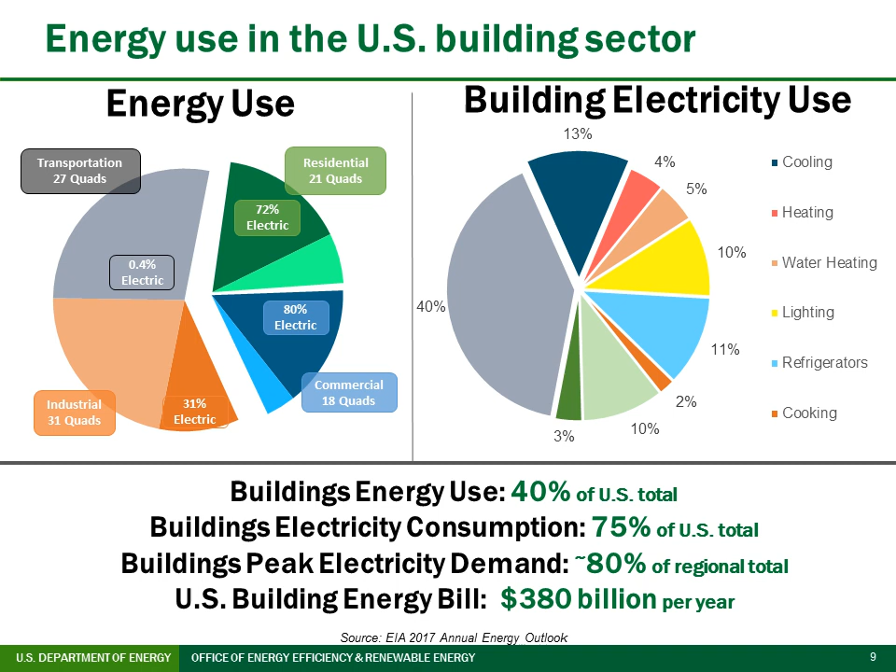And then, I won't talk about it today, but that growing wedge called other or miscellaneous. I'm sorry, I see on the right, the graph didn't come out. The color coding, the legend didn't come out, but that big gray on the left, that's 40%, is for other plug loads and other miscellany, which may or may not be time sensitive. Next slide, please. So those are the stakes involved here.

You've all seen this graph. You probably all presented this graphic. The Thomas Edison early vision is on the left, the one-way power flow, and that on the right. This is just a reminder of where we, as a nation, and we at the department, are bringing the power grid to an interactive, dynamic, flexible grid in which there are many resources to produce power and many opportunities to consume it more intelligently, and not just one-way or even two-way power flows, but multiple power flows. Next, please.

So we put a lot of effort in at the Building Technologies Office at DOE on, as I referenced earlier, helping buildings to be able to be a more dynamic part of the power grid. So even as they consume that 75% of the kilowatt hours consumed in this country, generally that's been static. You plug something in, or you turn on an air conditioner or an electric hot water heater, and it consumes the number of electrons it needs to do the job. And we've worked in this office, and many of you have, to make the process more energy efficient in a traditional way, do the same job or better with less energy input.

But now we're focusing a lot of our activity on making those loads flexible in a way that can be controlled by the end user, controlled by a building owner or manager, controlled by a third-party aggregator, and even potentially controlled by a utility or a grid operator on a dispatchable basis. And by making those loads more flexible, with more ability to do that, we can shift load. We can lower the total system cost, so that energy can be more affordable for American homes and businesses. And we can make the system more reliable, and we can help integrate renewables. That's our goal. And to be able to do all those things is a challenge.

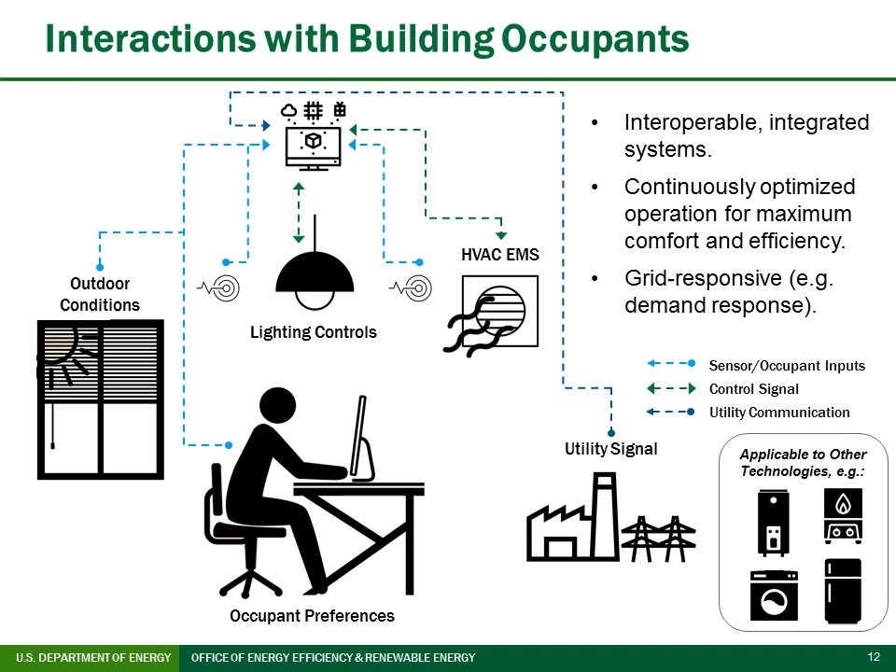Those are the capabilities that we're contributing to here with our research program and other programs. And again, that can be done because the occupant told it to do so, because the manager told it to do so, because a smart algorithm that was programmed told it to do so, or because the utility sent a signal saying prices are high or the system's stressed, or prices are low, and go for it. So next, please.

Of course, when I say go for it, we mean on a pre-cooling or temporary basis, not to be wasteful, but to shift load. So this concept, flexible building loads, which we often call grid interactive efficient buildings, and again, we want to keep that word efficiency in there. This is not just about load shaping and shifting. It's about making the buildings and the system more energy efficient in a grid interactive way.

Connected to the internet, so that those smart technologies and those remote opportunities can be taken advantage of, and we can control building load in a way to be more productive, more comfortable, more efficient through smart controls and through algorithms. So connected to the internet, but of course connected to the grid. It's connected to the grid now, but again, in a dynamic way, not just a passive way. And finally, flexible, which I've already described.

Next, please. The next slide, please. Sorry, I'm trying to make it advance, but okay. It is hung up for some reason. All right, thanks. Sorry about that. The reason I have to ask for this, our firewall at DOE, I won't even talk about cybersecurity today, but our firewall is very robust here at DOE, and we had a little trouble with the controls. Sorry, Kristen, can you advance the slides? I just got kicked off of the webinar. I apologize. No, we're good. Kristen, yeah, slide 14 is just where we want to be. Oh, I'm sorry, going forward, yeah.

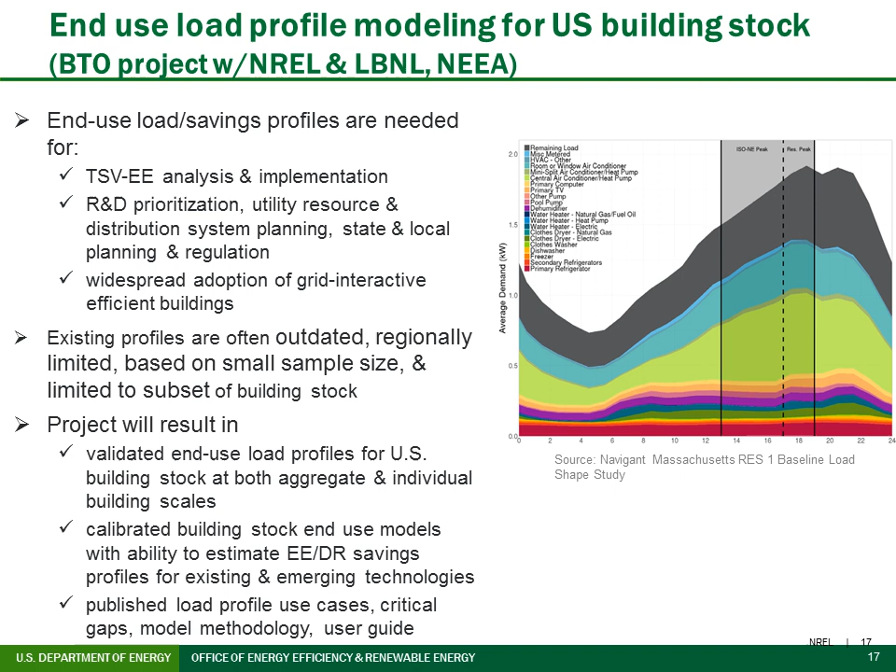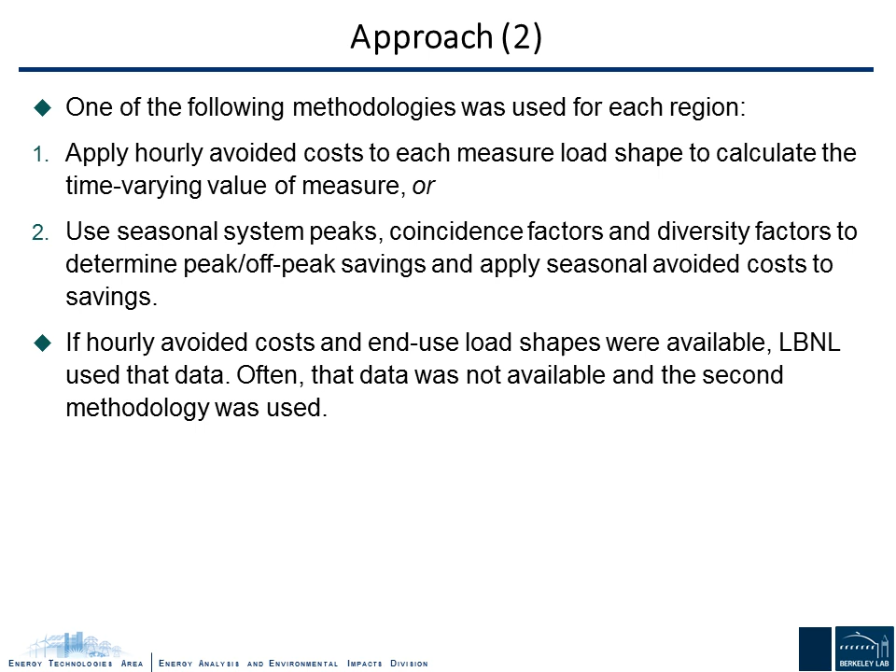This is a slide David showed in his presentation as well, from the analysis in our 2017 report. It shows the time-varying value of the 5 different measures in Massachusetts on a summer day. You can see that residential air conditioning, the top pale blue chunk of the bar, is for distribution, and the distribution costs along with the capacity costs really drove residential air conditioning value in Massachusetts on that summer day.

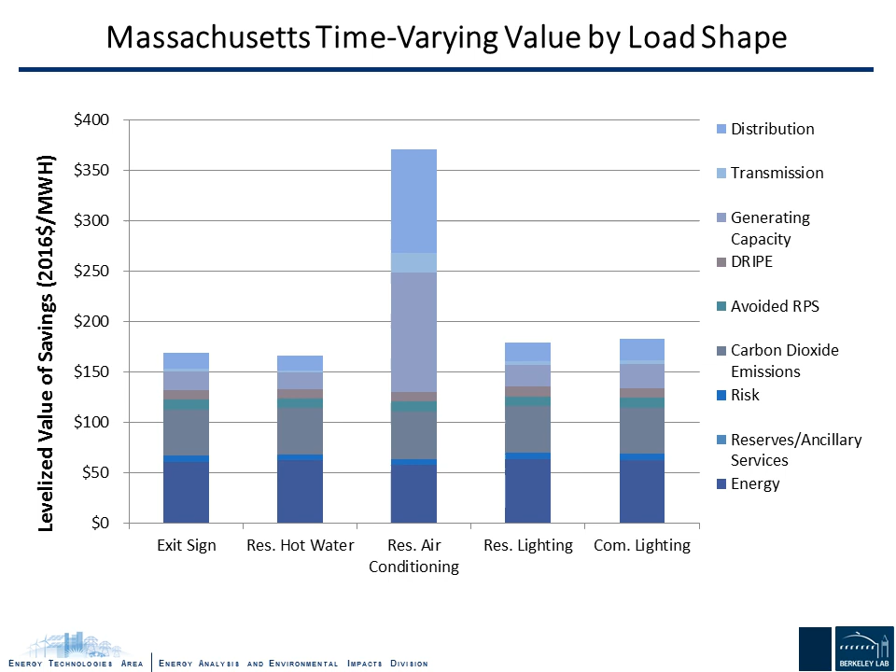So the different measures have different values. And if you looked at the winter slice of this data, it also looks different, and there isn't as much value for residential air conditioning, obviously.

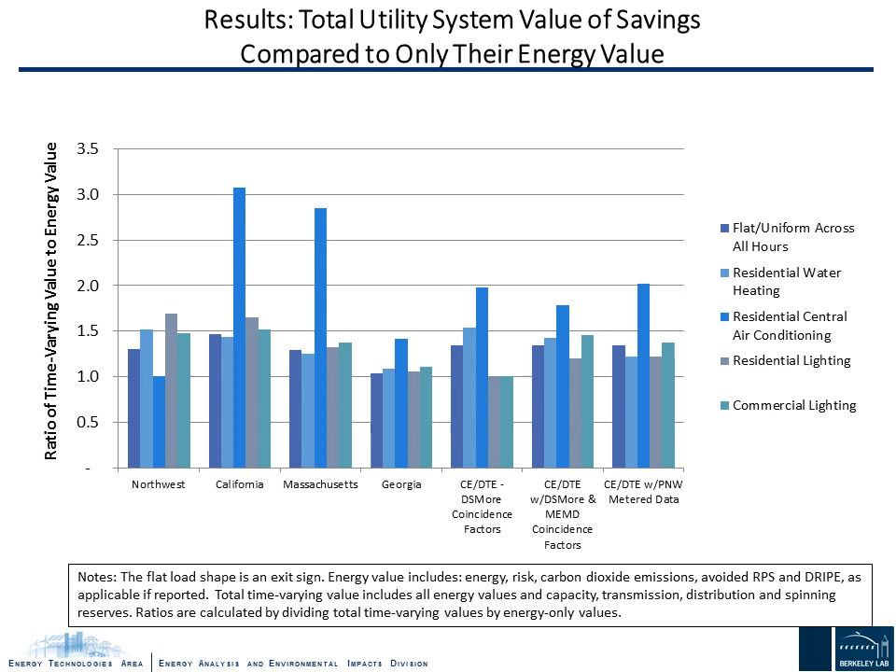I want to go through 3 or 4 conclusions and some examples pretty quickly. One conclusion we found important is that publicly available end-use load and energy savings shape data is pretty limited and concentrated regionally, and needs to be expanded. This is one of the reasons accurate load shapes are really important.

This chart shows that different load shapes from different data sources produce different outcomes, which isn't too surprising, but they can be extremely different. The tallest bar shows that simulated load shapes may not represent diversified loads, and the value for residential air conditioning is $500 for the levelized total utility system value, as opposed to load shapes not based on metered data, also simulated but more diversified, which are down around $200 per megawatt hour.

On the right side, our residential lighting chart shows that statistically representative metered data provides a more accurate representation. The far right bar is metered data from a similar latitude as Michigan, showing a value of under $70, as opposed to modeled data, which pushes the value of residential lighting up to $90.

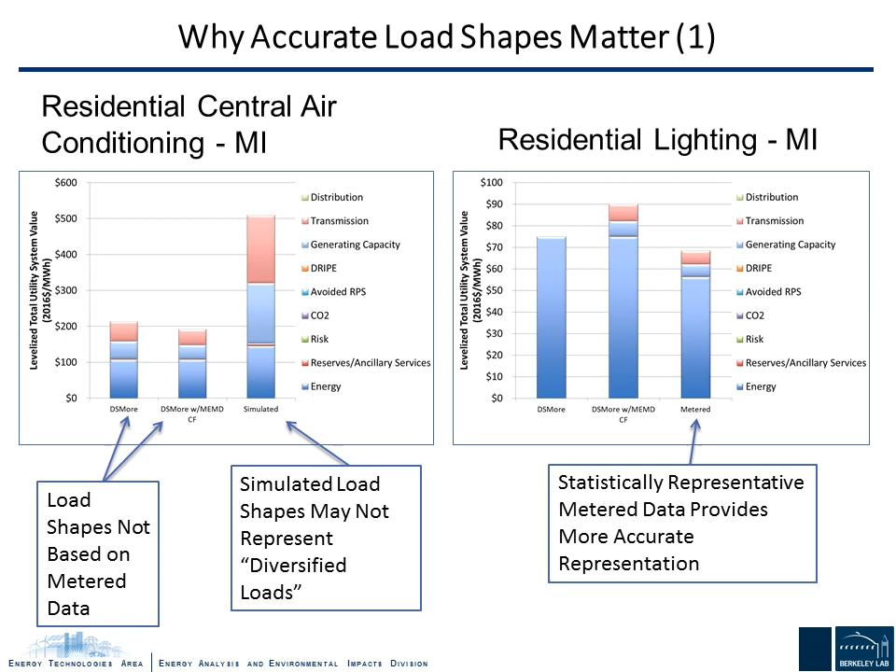I'll talk about this more on my next slide, which shows a graphic representation of the residential lighting example. The metered load shape shows a typical residential lighting pattern where lights go off at the beginning of the day, hours across the bottom of the chart. People wake up and turn their lights on around 7 to 9 a.m., then go to work and turn them off, then come home and turn them back on. So a pretty standard residential lighting shape.

That's producing a value of about $56 a megawatt hour, as opposed to some of the modeled energy efficiency for residential lighting that we looked at during our Michigan work, which produced a value of $75 a megawatt hour. So the modeled data was not as accurate as the metered data, producing different values. That's important because if you're planning your utility system or peak reductions around these values, you need to have them generating the appropriate values.

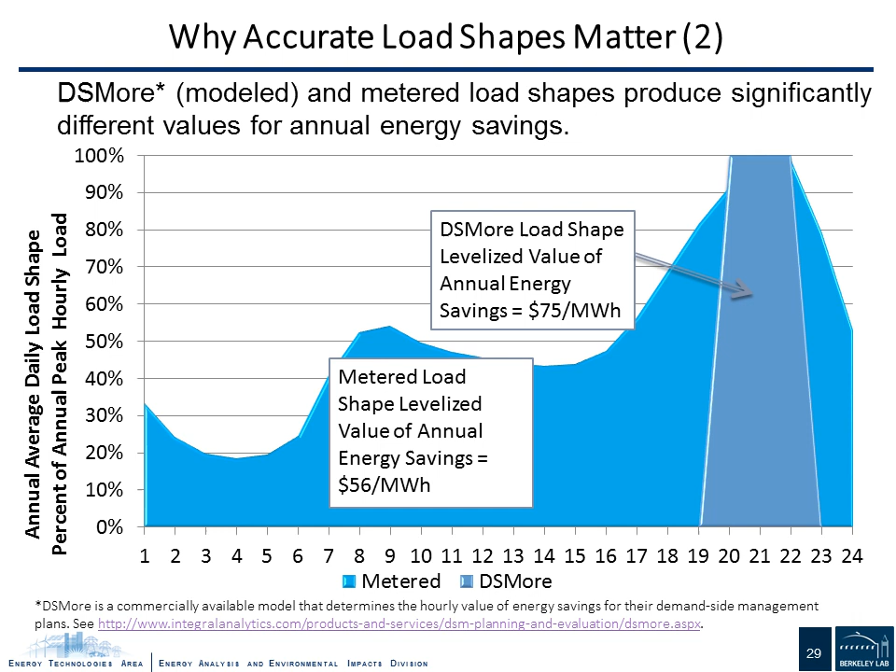Moving to the next slide, one of the other conclusions is that all avoided costs matter. In Georgia, we didn't have as much publicly available avoided cost data as in other regions, shown by only having two different colors in this stacked bar chart: capacity and energy. None of the other values were publicly available, so Georgia appears to have less value for efficiency than it actually does, based on conversations with the utility about what they use in their system planning, because they do have values for distribution and transmission.

They're just not available publicly. So when you start comparing across the country, if you're not looking at all the values together, you're going to have skewed outcomes, which may show values as higher or lower when that's not necessarily true. It's just based on the data that's available.

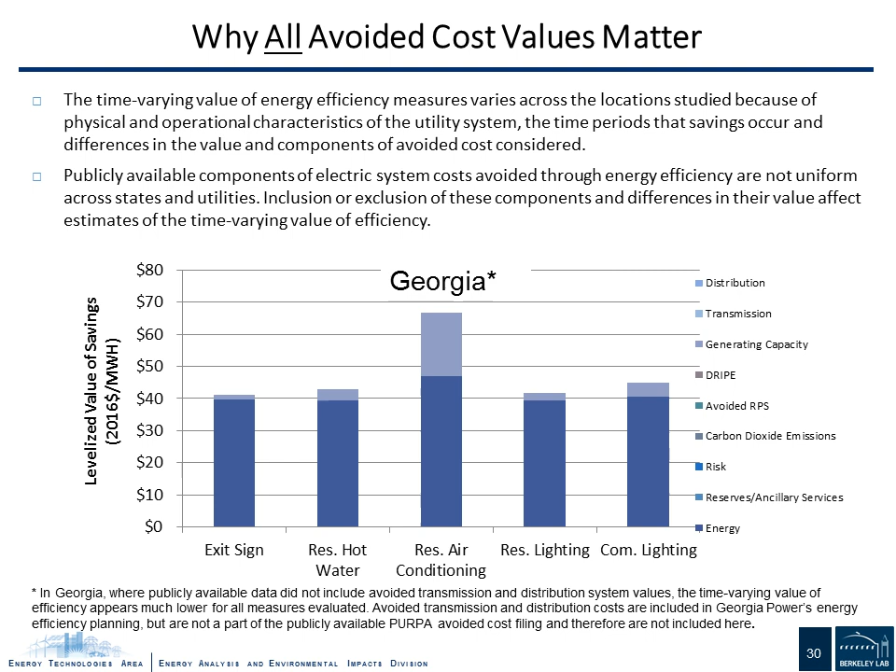Moving to the next slide, one of the other conclusions from the research is that the underlying electricity system shape is obviously very important. That's what's generating the avoided cost values and utility system values. And as many of us are aware, those values are changing.

This graph is from work that E3 did for PG&E, showing the difference from 2019 to 2024 in the increased use of distributed energy resources on the grid and the anticipated difference in load shape for utilities like PG&E. This was an important conclusion because the electricity system shape is changing in ways it hasn't historically, and the data we use to estimate the impact of efficiency measures on peak will need to be updated periodically to ensure we're giving appropriate value at times when the system is at its peak.

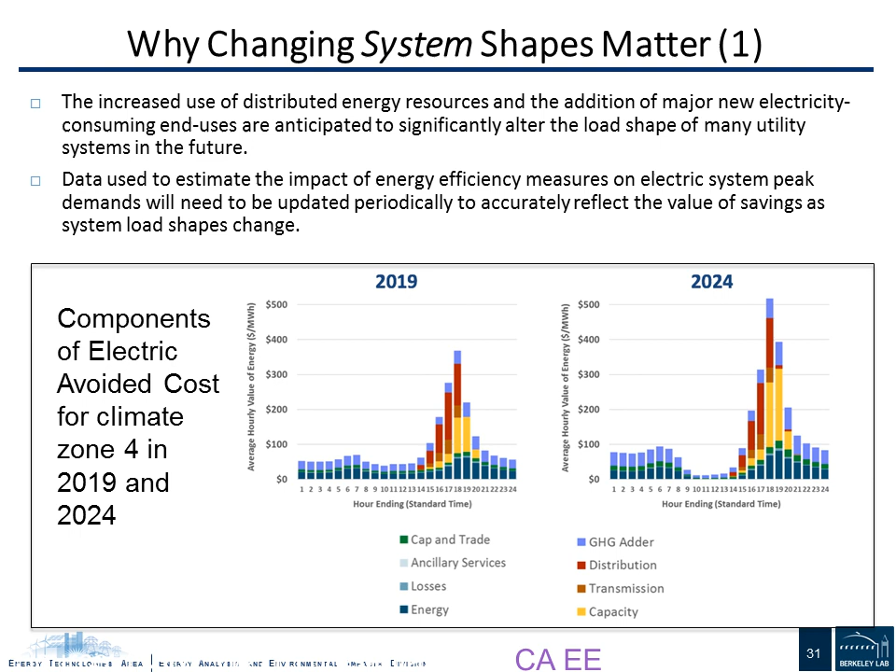That was a pretty big conclusion we came to. On the next slide, this is another example: a duck shape from work that Jim Lazar did for RAP, representing the opportunity for energy efficiency with this changing electricity shape. If we can use energy efficiency measures to reduce the ramp as variable generation winds down and people start consuming a lot of electricity going up that steep ramp, dampening that ramp will generate a lot of value and make the electricity system less expensive and easier to operate. So as the system shape changes, there are still opportunities for efficiency.

Moving on to the next slide.

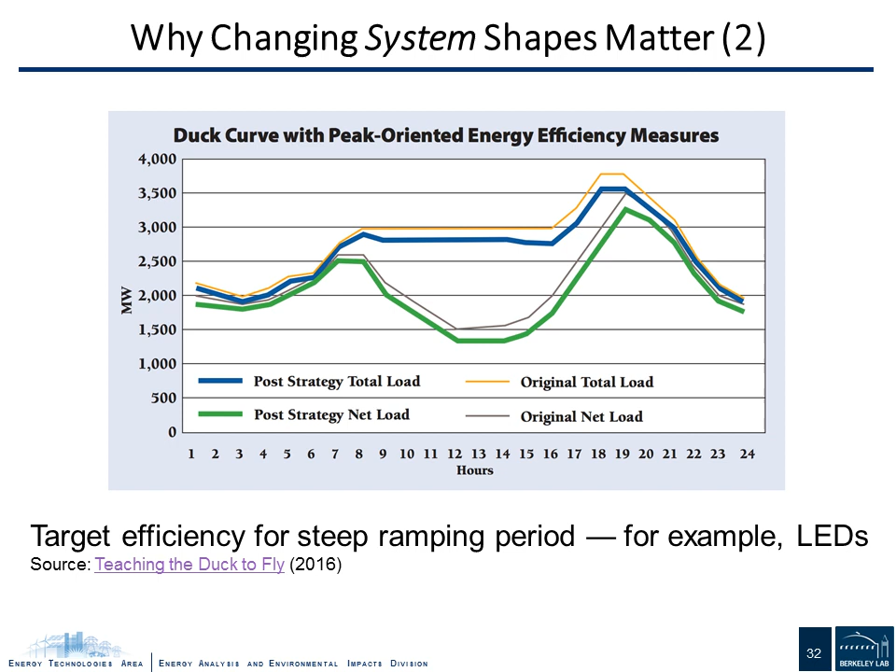I think this is my last example of some of the conclusions we came to, and this is about saving shapes. A saving shape is the difference between the hourly use of electricity in the baseline condition and the hourly use after installing an energy efficiency measure. For example, the difference between hourly consumption of an electric resistance water heater and a heat pump water heater over the course of the year.

In other words, the timing pattern of savings from the substitution of a more efficient technology doesn't always mimic the underlying use. If we can go to my last slide, this is a visual display of this idea that a savings shape may not align with an end-use load shape.

This is data on the top from Massachusetts and on the bottom from the Pacific Northwest. The green line in both of these charts is from a heat pump water heater, and the red line is electric resistance heat. You can see that the shape is different from electric resistance heat, which is typically what's modeled for the end-use load shape, than it is from the heat pump heater.

If you're planning your electricity system around these peaks, your savings may not align with what you've typically thought the consumption looked like, which is going to alter the value both to the electricity system and to the consumers.

So this is just more of the same in regard to why end-use load shapes are important, why the time-sensitive value of efficiency is important, and why we continue to be interested and want to make sure we get these numbers correct. So I will stop there, and I will hand the controls over to Judd to talk about his work. Thank you.

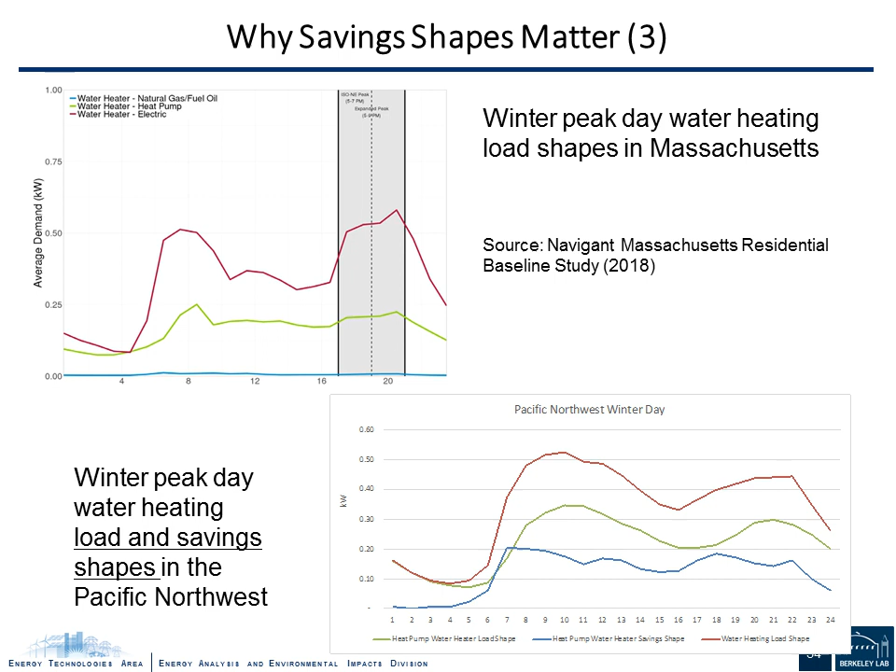Great. Thank you, Natalie, and thanks everyone for having me on this call. I'm excited to tell you about some work that I've recently been doing with my colleague Lucas Davis at UC Berkeley and the Energy Institute at Haas at UC Berkeley. This work was supported by the California Energy Commission, so we're very grateful for that support.

I think my colleagues on the webinar have done such a great job of setting up the question that I can actually skip some of this introductory material. So I'm going to skip the first few slides and go right to the research questions.

What we're going to think about in this paper is we're going to use smart meter data, highly granular customer level electricity consumption data, to see what we can learn about time-sensitive values of energy efficiency. There are basically two things that we do in this project. The first thing is that we use smart meter customer data to think about when energy efficiency upgrades deliver energy savings.

Then we use electricity market prices to think about the value of each unit of electricity savings at different times. Our ultimate objective is going to be to calculate estimates of how the value of different energy efficiency investments change after we account for time-sensitive values. In many ways, this is going to be highly complementary with the work that Natalie just showed you. I think the piece that differentiates this is that we're going to be working with individual customer level actual consumption data, so that's where I'll spend most of my time.

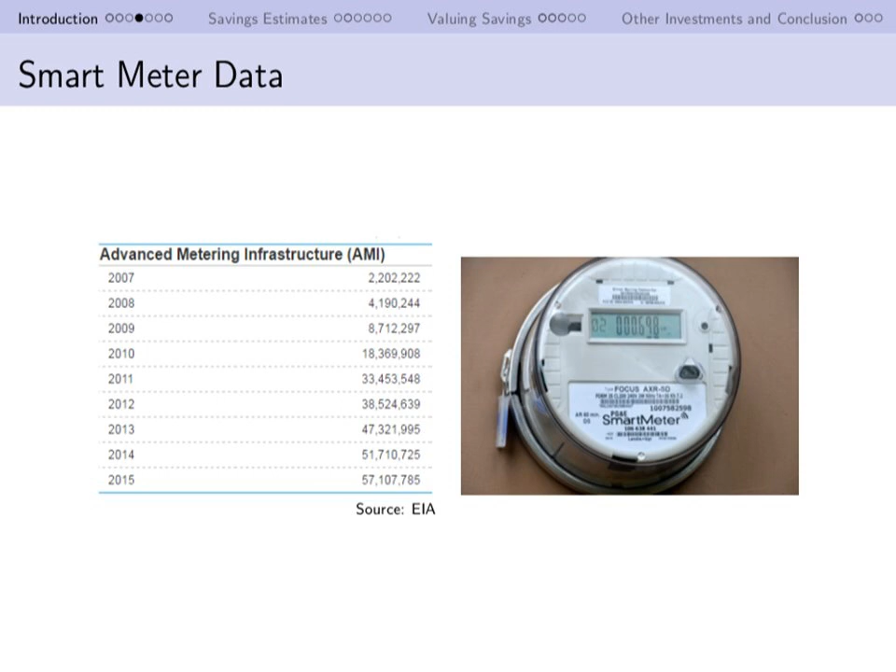Of course, the reason that we're able to do this study now, and that we couldn't have done it 10 or 15 years ago, is because we have had, over the past few years, a rapid rollout of customer smart meters. This slide goes through 2015, and this is even more exaggerated today, but we now live in a world where a large fraction of electricity customers have their consumption metered at an hourly or sub-hourly level.

Specifically, what are we going to do in this paper? The first thing we're going to do is we're going to look at a large sample of Southern California Edison customers who participated in an air conditioner rebate program. We're going to be thinking about households who replaced a central air conditioner with a new energy efficient central air conditioner. We're going to calculate energy savings by hour of day and season of year for that air conditioner replacement.

Then we're going to value those savings, as I said, using energy prices and capacity market prices, and I'll tell you how we think about that calculation. We're going to find that accounting for timing for residential central air conditioners raises the implied value of the air conditioner program substantially, by about 40%, depending on how we do the calculation.

Then the last thing we'll do is we'll use engineering estimates for savings profiles for a number of other energy efficiency technologies to think about how what we call these timing premiums compare across different energy efficiency investments. That last part's going to overlap a bit with what Natalie showed you, so I may go through that quickly.

I'll skip this for time, but I'll just say that we, of course, build on work by a bunch of other academics who've come before us and have done high quality research. And I'll also go quickly through this, but the particular energy efficiency program that we're thinking about is Southern California Edison's Quality Installation Program, which provided rebates of $500 to $1,100 to households to install an energy efficient central air conditioner.

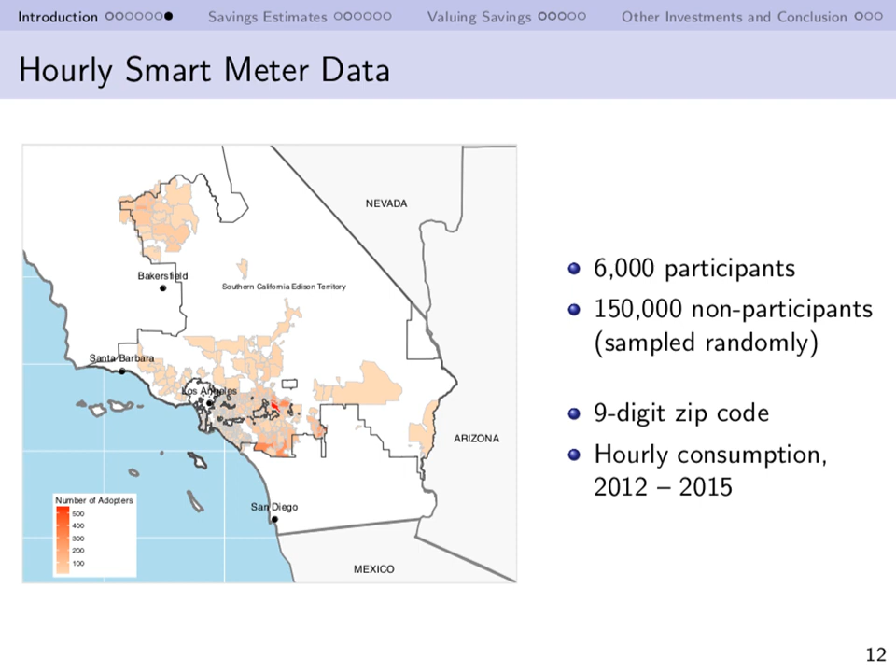So the data set that we're going to use for the main component of this paper includes 6,000 households who got a new air conditioner, and 150,000 households that did not participate in the rebate program. We're going to use them as a comparison group in some of our regression specifications. And the things that we know about these households are their 9-digit zip code and their hourly electricity consumption from 2012 to 2015. I'll skip the details of the regression.

I'm happy to talk about this in the Q&A, but I'll just say that we measure energy savings for participating households using standard program evaluation techniques. Essentially, we're going to measure the change in household electricity consumption after installation of the new central air conditioner. And the fact that we have highly granular electricity consumption data and that we're able to compare consumption to a reference group of non-participating households makes us pretty confident that we're able to control for potential confounders like weather and seasonality in electricity consumption.

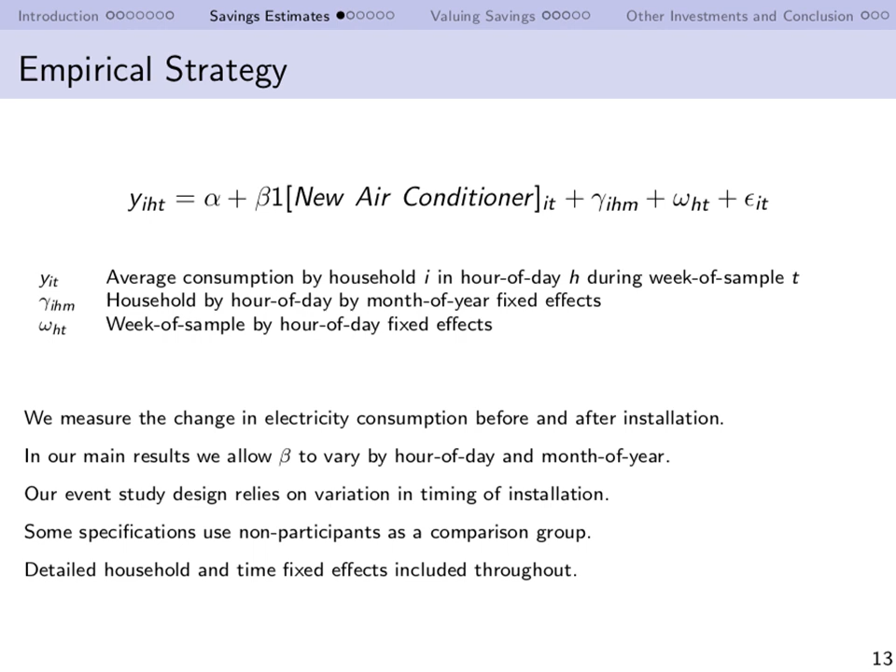So let me tell you quickly what happens to overall electricity consumption when households get a new energy efficient central air conditioner. In the summer, hourly electricity consumption falls by about 0.2 kilowatt hours per hour. In the winter, we don't see much change in electricity consumption, which is not surprising. And overall, depending on exactly how we want to set up the regression, we find that getting a new central air conditioner saves this sample of households about 400 kilowatt hours per year.

In the typical literature on energy efficiency program evaluation, this is where the study would have stopped. We would have said, okay, this thing saves about 400 kilowatt hours a year for this type of customer, and we would have valued that with some sort of average price and come to a conclusion about the value of the program. We are going to push further and think about time-sensitive valuations.

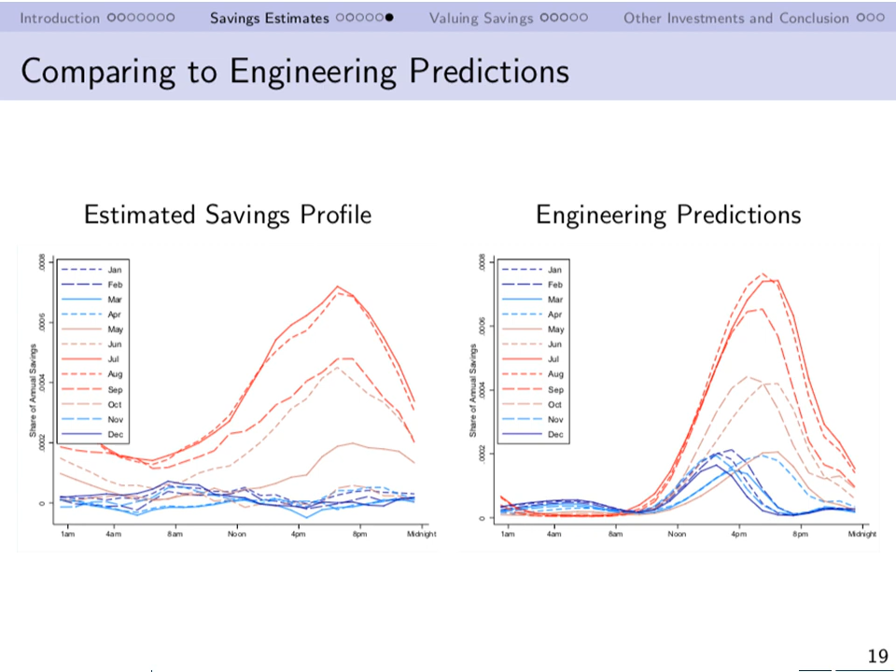For example, we find that essentially all of the savings are coming in the summer, while engineering models, at least the one that we think about most in this paper, imply meaningful savings in the afternoon and the winter. We also find a larger share of savings coming overnight and in the early morning. So this is interesting, although on the whole, I think what we conclude is that the estimated savings profile and the engineering predictions are relatively similar.

So far we have highly granular estimates of electricity savings. The next thing we want to do, and I'll talk about this quickly, is we want to think about how to value each unit of electricity savings at different times of day. So we're going to bring in wholesale electricity prices. We're also going to bring in capacity prices.

In the paper, we have a section where we think about how to allocate those capacity prices to different hours of the day. Because obviously we're able to observe wholesale electricity prices in real time. Capacity prices we only observe at a monthly or annual level. So there's some work in the paper to translate those to hourly values, which basically involves assigning capacity value to the highest demand hours every year.

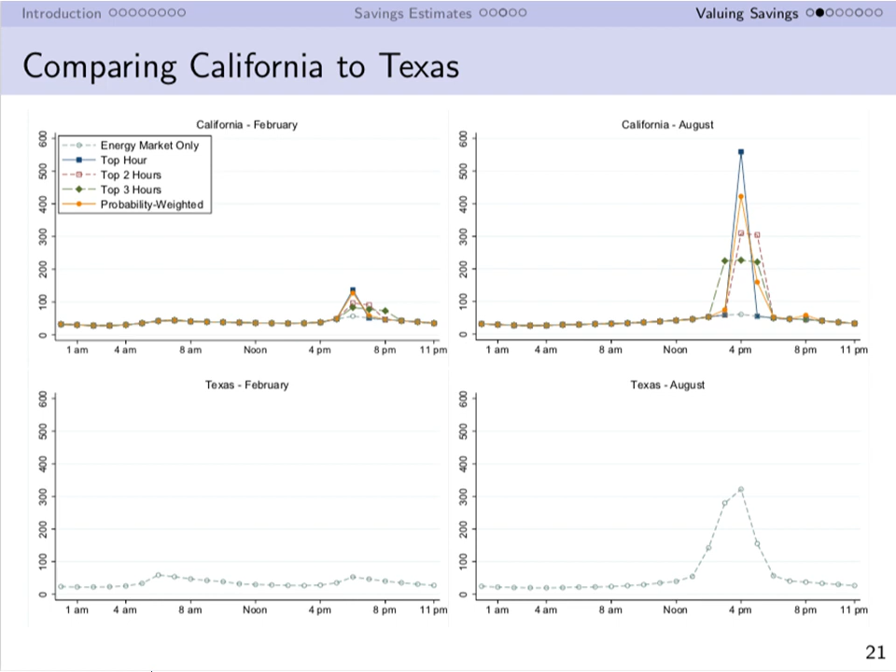And the different colored lines in the top panel are showing you different ways that we use in the paper to assign capacity value across hours, but the story is relatively similar. The bottom panels are the ERCOT market. ERCOT is a little easier to think about. It's an energy-only market, so we don't have as much work to do in terms of capacity values there. But again, you can see that the price profiles in ERCOT are broadly similar to California.

Putting the savings and prices pieces of our paper together, we find that during the summer, the correlation between high energy savings and high energy prices is quite pronounced for central air conditioners. During the winter, that correlation, of course, doesn't exist as much because essentially air conditioner investments just aren't delivering any savings at any time in the winter. So that's a flat relationship.

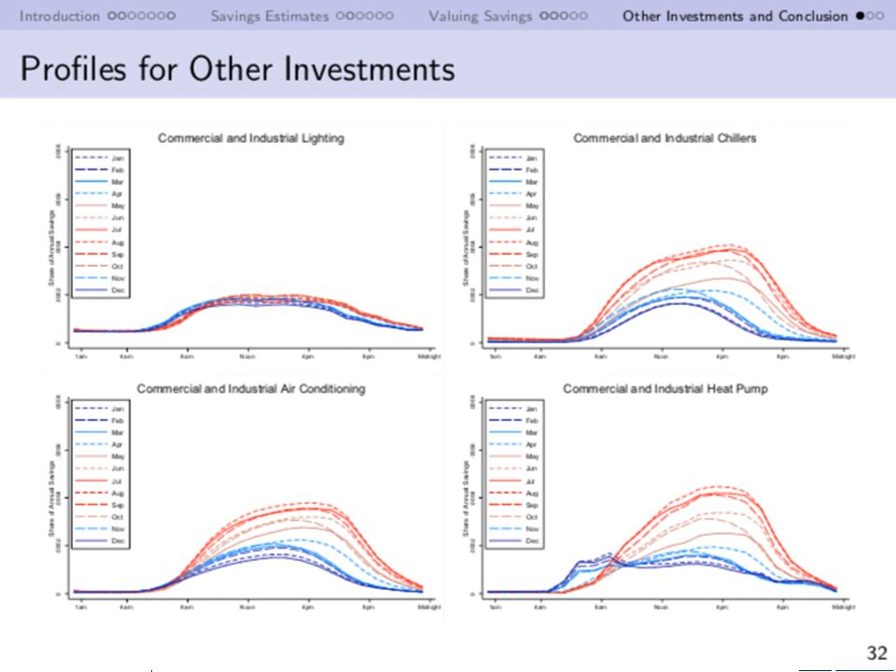I'll skip the next two slides, which show you load shapes for different energy efficiency investments from the engineering literature, and just wrap up by showing you a summary slide at the end of the paper where we say, let's think about a bunch of different potential energy efficiency investments that all have different savings shapes. And let's think about 4 different electricity markets where we've tried to account for energy and capacity value where appropriate. And just think about how accounting for time-sensitive value changes the implied value of each of these energy efficiency investments.

So residential air conditioning in the top row here becomes substantially more valuable in California and Texas after we account for time-sensitive value. In New York, the effect of accounting for time-sensitive value is a little smaller for the reasons that Natalie talked about, that this is essentially a place that frequently experiences high electricity prices in the winter. The other thing I want to point out is that most other investments have smaller timing premiums than air conditioners on the residential side, which is not surprising.

There are some small negative numbers in this top panel, which essentially means that these are investments that actually look a little bit less valuable after you account for time-sensitive value. So these are things that actually seem to deliver electricity savings at disproportionately low value times, so at night or possibly in the winter in a summer peaking system. And then in the bottom panel, we also find that accounting for time-sensitive value is also quite important for commercial and industrial energy efficiency investments.

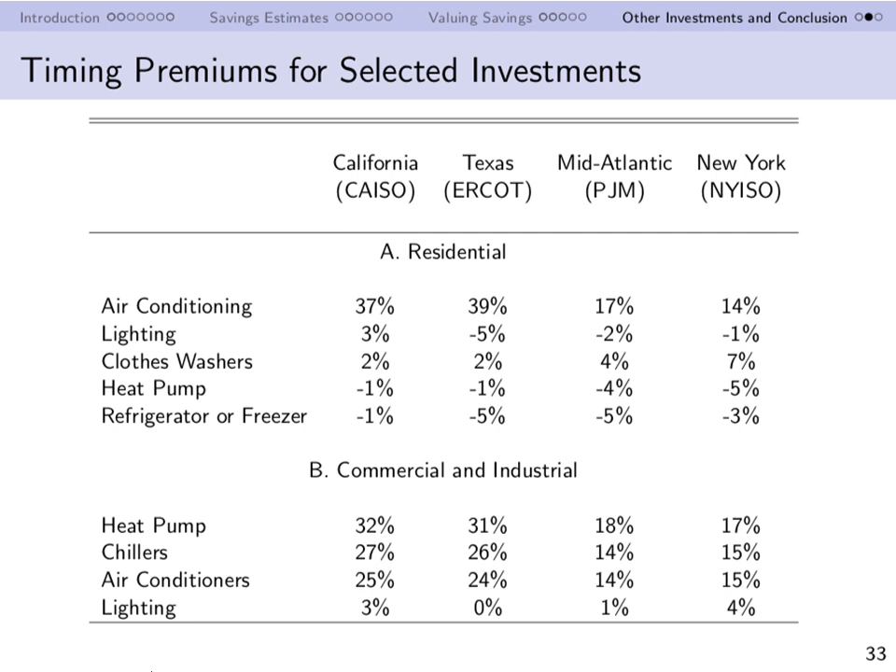And today I'm just going to talk about some analysis that we did, and the title is "Is a Duck Curve Eroding the Value of Energy Efficiency." First of all, a little background on Strategen Consulting. We provide technical support to public, private sector, and NGO clients on state-level policy and regulatory issues with a focus on the power sector. In addition to energy efficiency, some of the issues we focus on include solar PV, energy storage, electric vehicles, rate design and cost of service, integrated resource planning, and interactions between distributed resources and wholesale markets.

Recently, we conducted some analysis for the Southwest Energy Efficiency Project, one of the regional energy efficiency organizations, to support their efforts in proceedings before the Arizona Corporation Commission. And a portion of this analysis serves as the basis for my talk today. Just a quick overview for today's topics. I'm going to cover a little bit on energy market trends in the southwestern U.S., some of the recently proposed changes we've seen to utility demand-side management programs in the region, and then some of our analysis on the implications for current and future DSM cost-effectiveness.

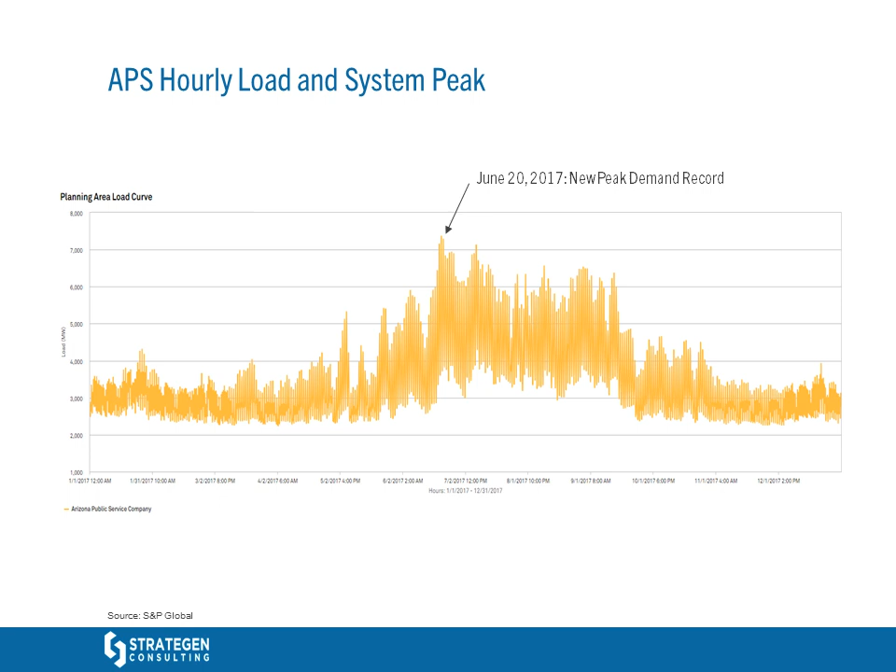So the fundamental question is, what is the value of energy efficiency now and going forward? On the one hand, we've got reduced value of EE if savings occur during the belly of the duck when there may be lower or negative energy prices, but we also have increased value of EE during peak load hours of increasing peak demand.

So we set out to do some more analysis on this, and we took a look at 8760 hourly market prices, both recent historical prices and forecasted future prices. And then we also took a look at the 8760 hourly load shapes for some different measures, as well as an aggregated portfolio of DSM measures. And then we combined these two to come up with a time-weighted avoided energy value for the DSM measures.

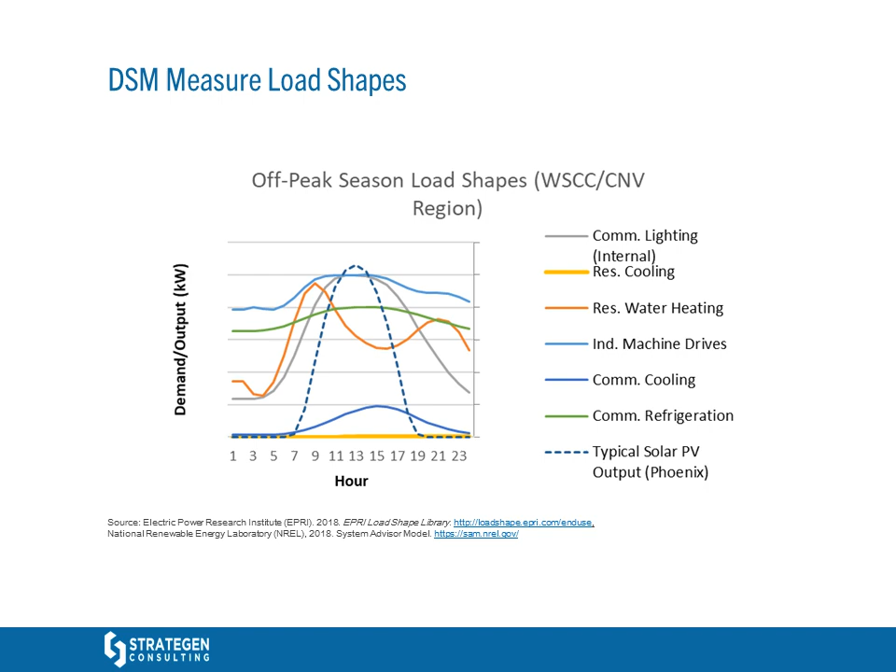And here is a picture of some of the DSM measure load shapes, just to point out that some measures, such as the commercial lighting shown in gray there, have a stronger overlap with the typical solar PV output, and others, such as perhaps water heating or cooling, don't have as much of an overlap with that, in this showing an off-peak or non-summer load shape.

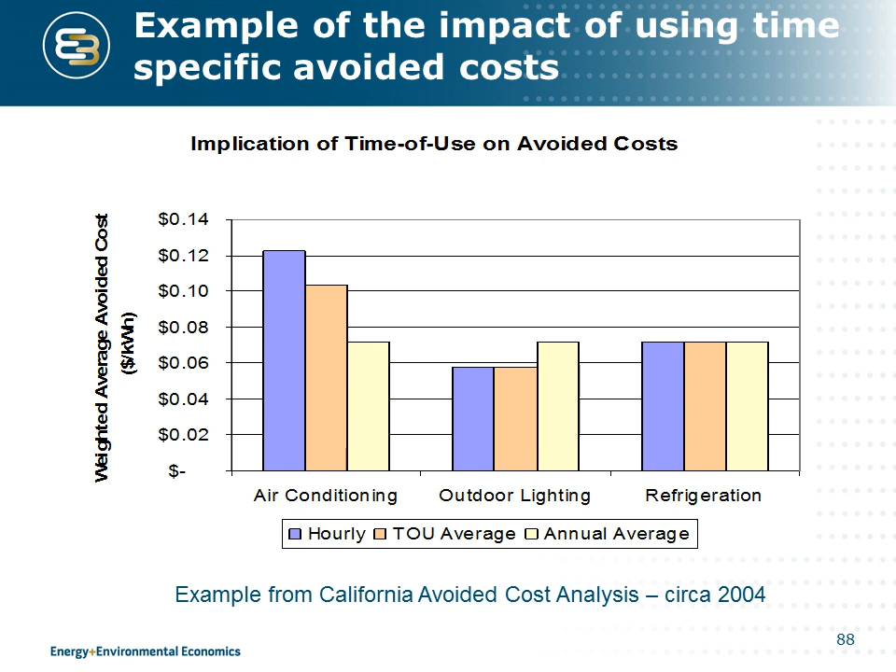The inputs that we get for long-term forecasts of each of these really come from the resource planning type of analyses that the state is doing. So they're sort of a natural output of the supply side assessment. And California is moving towards integrated resource planning where we've integrated the demand and the supply side. I don't think it's necessary to go all the way to that level, but if you are looking for hourly data for these different components, it's definitely worth your time to make friends with the resource planners in your jurisdiction or in your community because they have a lot of this.

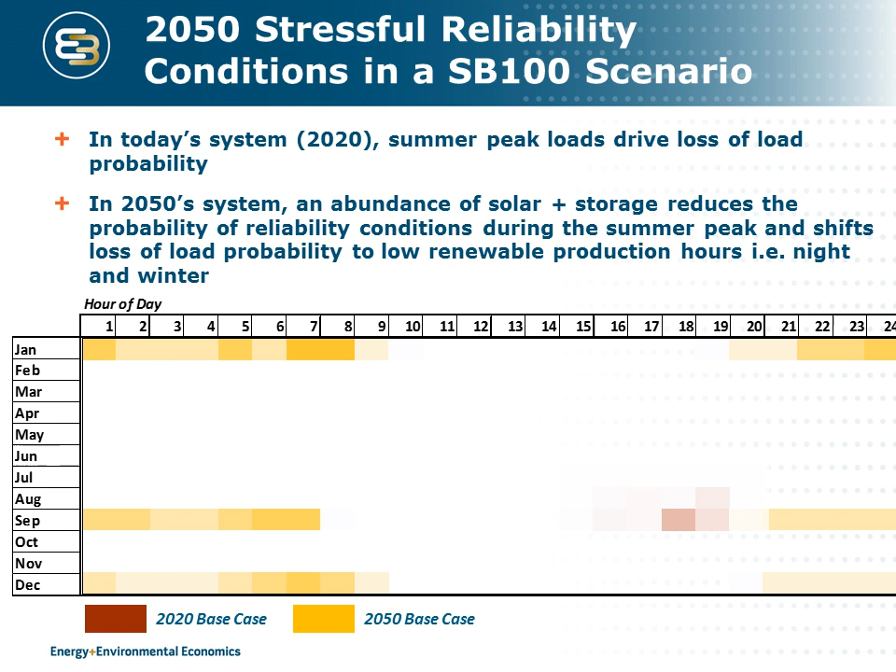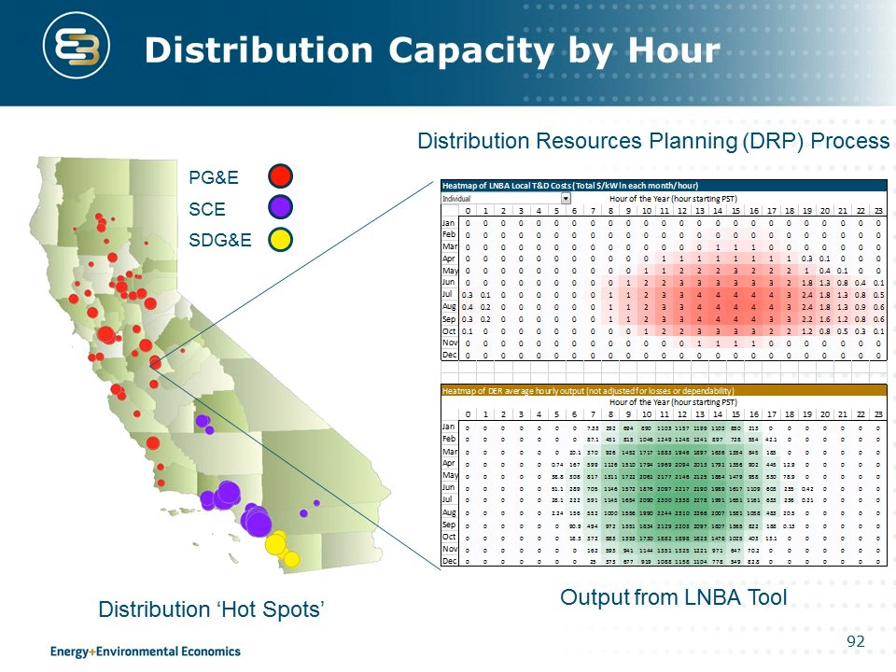I point this out because this can layer on top of that system. So you can have efficiency that both tackles the local capacity issue as well as the system. The avoided costs in California kind of include both of those.

So this is an area where there's been a number of different approaches, and I think it's new enough that the theory and approaches for answering this question in California are still an active discussion. So then I just wanted to show a quick example of how this is working.